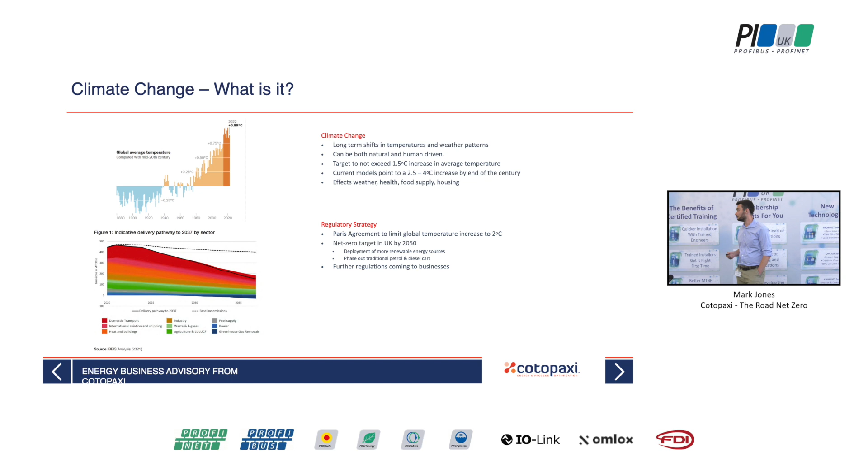So net zero, what, why and how, a brief description on the screen there of what net zero is, but really the reason is why we're doing it.

So I touched on the climate benefits and the real driving force for why the world is wanting to do it, but from an industry point of view, there's a number of different reasons why you, as someone in the industry sector, would want to do this.

Those are being cost savings, environmental compliance, enhanced brand value. So when you're trying to sell your goods or services, it's really important that you've got a good environmental strategy. And as younger people come into the marketplace, that's really what they're looking for, both even in looking for employers, looking for buying services and goods.

There's reduced business risk because you're not going to further down the line get caught by all these regulations that will come in later. And then you improve your CapEx deployment by getting ahead of the game rather than having to put in millions and millions of pounds at the very end of it. You can start to make that journey begin just now.

So how do you do it? Well, it's a long process, but if we cut it down into three main stages, what we need to do is the measuring, monitoring and targeting part of it, which is where we get the data, bring that back into a system that allows us to analyse it, to benchmark it against best performance, to look at KPIs that will then support you to drive down your energy consumption, optimise those existing systems that are on site, and try to reduce your current energy consumption down to as low as possible or as best practice as we can, and then look at trying to implement zero carbon energy systems.

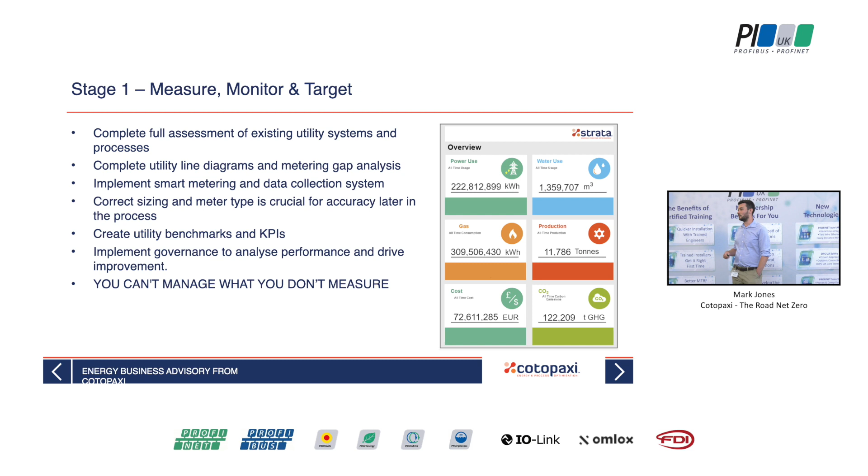You need to go through these processes, understand your data, where it's being consumed, what it's being consumed on, and how that's functioning, before you can say you're going to be net zero by 2030 just because the marketing team says you should be.

From that, we then get into looking at the data, setting our KPIs and performance reviews. These are just some snippets from our Strata platform, but you get the idea of looking at the data, understanding where you're currently using all your energy, and then trying to optimize that solution.

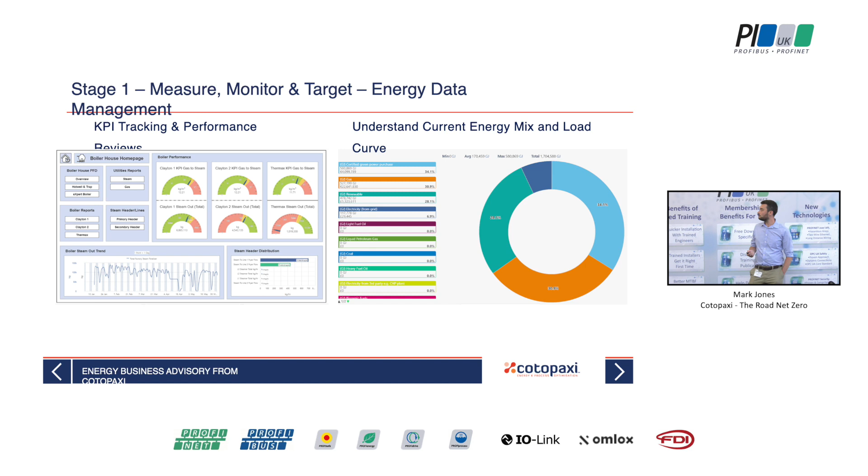So we're improving the understanding of how the machinery is controlled in the factory. This is a simple example, but you can scale it up to look at full steam systems, boiler systems, the whole compressed air system, leakage rates, all of that kind of stuff, improving our understanding of load profiles and the baseline consumption of the site.

By having the data, we also allow ourselves to validate any improvements we make. For any projects or opportunities we identify and implement, we can use this data to say, look, we've gone from spending 40 kilowatts over the weekend to zero.

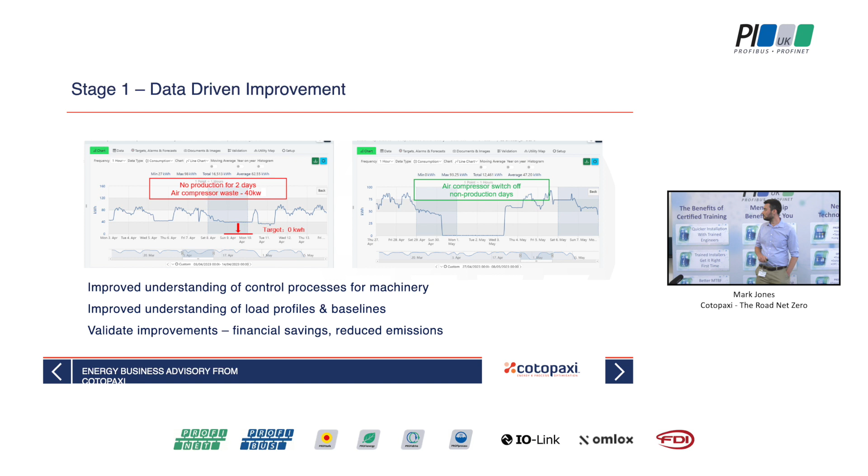Stage 2 is to optimize existing systems. That's looking at what's in your factory at the moment, your boiler house, refrigeration system, compressed air system. For the boiler house, for example, are there any opportunities for heat recovery? How much condensate are we returning to the boiler house? Can we optimize that to drive down how much natural gas, electricity, or water we're consuming at the factory on an annual basis?

It's also important to understand what the loads are, whether they are constant demand loads or cyclical loads, and how that would translate into recovering heat or implementing green technologies, because some green technologies suit a solid load better compared to cyclical demands.

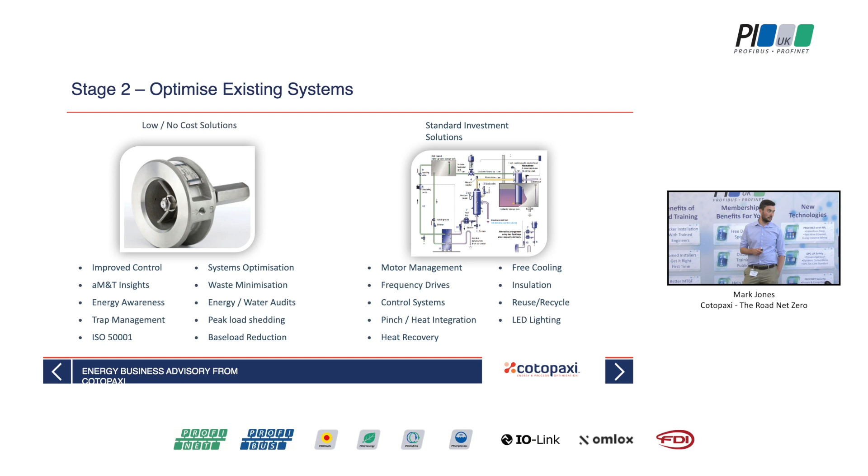So we go through this process looking at all the different ways that we can optimize the existing systems. This is a list of some of the stuff we look at, going from low cost, no cost, easy to get low-hanging fruit in terms of optimization, through to standard investment solutions, which is looking at best practice and implementing engineering solutions to drive down your energy consumption.

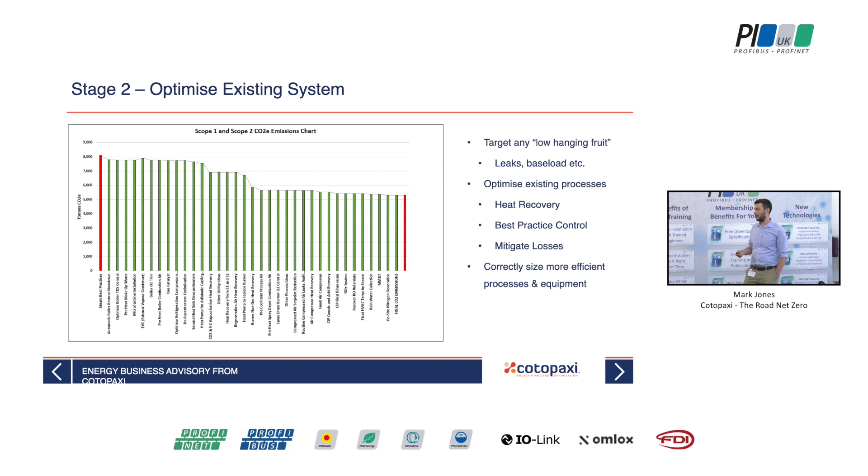Can I optimize those processes? Then where am I at? So this is just an example, but you could go lower than that. It's important to go through this process so that you, as a company and organisation, don't waste money by jumping in head first into the green renewables sector.

And then we go into the final stage, which is implementing low or zero carbon technologies and energy systems, looking at how your load profile is across the factory, what processes you have, how those interact with each other, and designing systems around implementing these green technologies to basically decarbonise your energy load.

So there's a number of different technologies out there. Each of them has its flaws and good points. It's all about finding a balance between different technologies that will allow you both to expand in the future, and also to change production from product A that uses 80% heat load in the factory to product B that's only a small percentage heat load, and how your green technologies will allow you to change between those different opportunities and production runs.

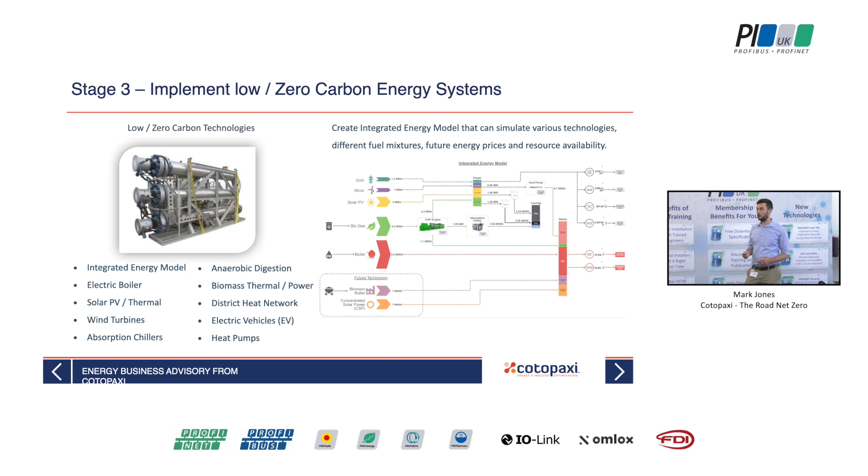So at Cotopaxi, we do what we call a sustainability master plan, where we look at each of these individual technologies and how they're available in the country or area that you operate. We look at what other renewable energy sources are available, hydrogen, biomass, and others, and we try to build different options that allow you to run your factory as you want to, but utilising green technologies.

So once we put together how different technologies will support you, once you've done all your optimization and we know what your real baseload is for the factory, we can then use these green technologies to drive your journey to net zero.

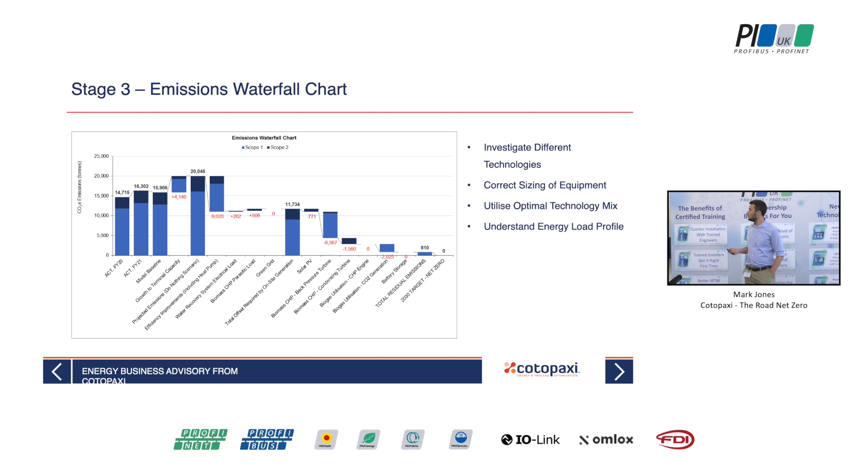Rather than having to put in 800 plus kilowatts of green technologies, you've currently only got to put in 200. So you're reducing the overall capex that you've got to deploy at your site for green technologies, but you're getting to your net zero goal, which is the aim.

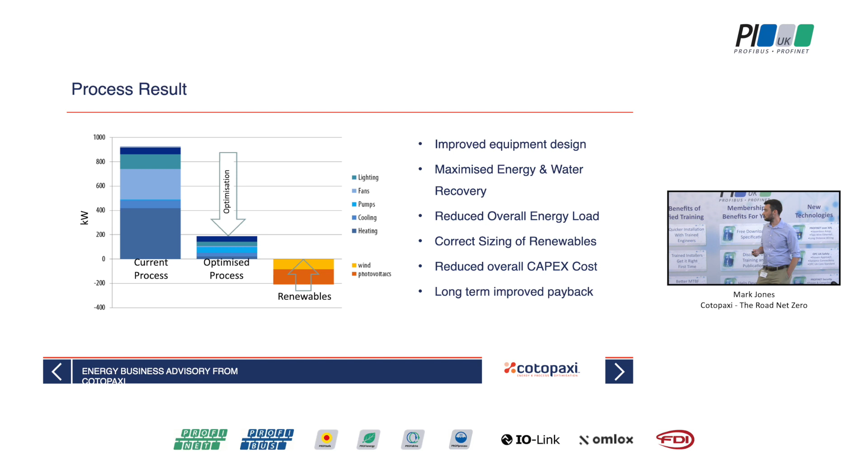So just to give a quick recap, the 3 stages that we want to go through - it's really important to understand how your plant operates, and that's through hourly data, down to minute data, looking at hourly loads, daily loads, weekly loads, rather than just looking at your monthly invoices that come in. Then putting a team in place together with third-party support that will allow you to drive and optimise and have governance over your energy consumption and utility usage.

Once you've done that, we need to look at how we optimise those existing systems using best practice, and then implement zero carbon energy systems. There's a whole raft of those zero carbon energy systems available, and it's all about picking what's best for you and your business.

So that's a brief run through of the Cotopaxi process, what we do when we look at the road to net zero, why data is so important to drive those decisions that we make, because without the data, we jump straight in and we make mistakes, which always happens.

So that's the kind of process that we go through. Does anyone have any questions on that?